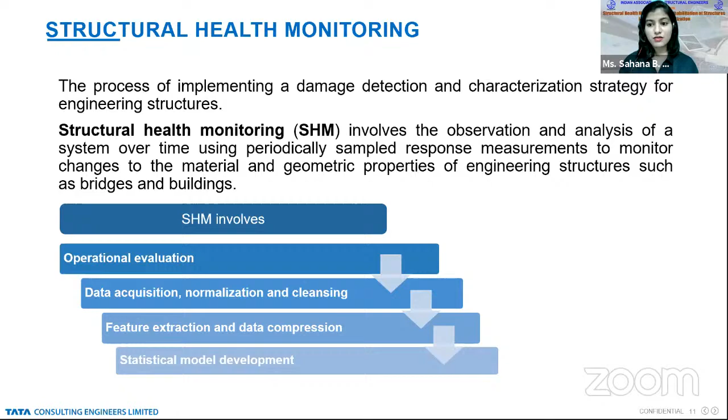So this process is nothing but damage detection. Based on this damage detection, a strategy is made for the engineering structures. It basically involves observations and analysis of the system over time. When I say over time, it's not just for a week or a month, it's over the years, where we can observe even slight changes in material or geometric properties, based on which we can come to a conclusion that there are some abnormal observations, and there might be chances of damage or failures.

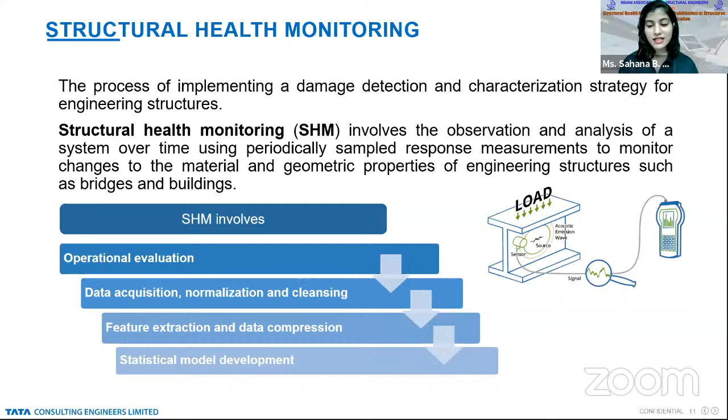So SHM is a bigger process, not just a one step process, I would like to say. It involves a lot of steps. First is operational evaluation, then moving to the second one, data acquisition, normalization, and cleansing. After this is done, we go for feature extraction and data compression, and then we move forward for statistical model development. I would discuss in detail about these processes in the further slides.

First, let's see - we discussed about digitalization, and we discussed about structural health monitoring. But how will digitalization actually complement structural health monitoring? This is totally a new area, least explored. I would agree with Vishalakshi ma'am on how before it was just visual inspection, where if we saw something irregular in that part of the structure, we would then go for non-destructive testing, which again involves a rigorous process. But this can be labor intensive, and we are not sure we are getting accurate results as well.

And that was because until now there was limited exposure to this technology or data analytics, and manual assessment was, I would say, still widely preferred. But the good part is that sensor technology has paved its way into the current generation or current industry, which is gaining ground and will be the future as well. So what exactly happens in sensor technology is that we are using a variety of sensors.

To be specific about these sensors, they are very sensitive to any changes happening in the structure. Because of this sensitivity, we can detect cracks or any abnormal level of stresses or temperatures, and know beforehand that there are some irregularities or abnormal behavior.

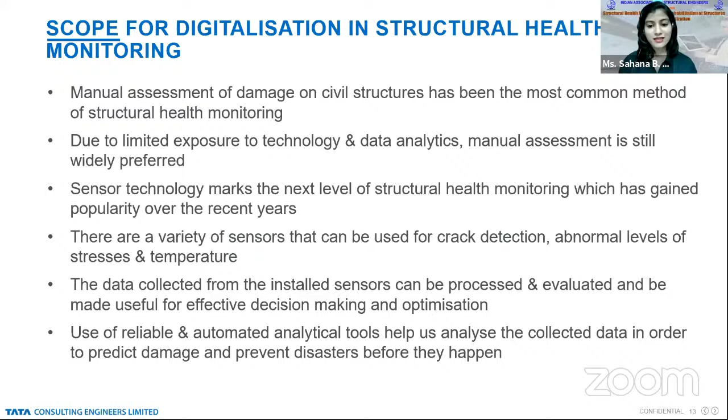There are a variety of tools, but as an application, it still has to be explored in structural health monitoring. But it's good to know that people are now actually using sensor technology for data collection. That's the first step towards the betterment of this process.

Now I would like to move forward and discuss the complete process of how structural health monitoring can be carried out. The first step is always operational evaluation. When we start a project, we should always discuss the scope: what is the building for, what's its purpose? Even when deciding to set up a structural health monitoring system, we have to decide exactly what we are performing the structure for.

Are we performing it just to know about the operational or environmental conditions, or are we assuming that after a certain point we might experience a failure? This totally depends on the type of structure which is going to be monitored.

These are the few questions operational evaluation focuses on answering. Firstly, safety is of major importance, so we must see what the life safety implications of installing these sensors are. Also, cost is always an important part - is there economic justification? Initial cost of sensors can be high, but is it really justified over years of performance, where at the end of the cycle we can improvise and extend the life cycle of the structure? That's what operational evaluation first tries to figure out.

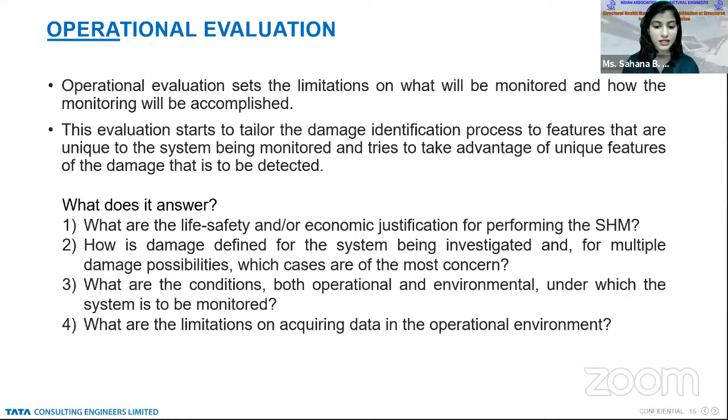Based on all these questions, the complete scope of structural health monitoring is first set up. Once this is done, the next process is to decide upon the type of sensors. Based on the scope, we will decide what type of sensors to use, the number of sensors, and the location at which they will be placed.

Once the sensor is placed, how do we take the data, what is the storage, where do we store that data, and where is the transmittal hardware. The most important point is the interval at which data should be collected. Sometimes it's every 15 minutes, sometimes 30 minutes, sometimes even every second. That totally depends on the scope of that particular project.

Moving forward, sensors are the main point in structural health monitoring. There are particular types of sensors used especially for SHM to facilitate this monitoring process, so engineers can make decisions based on the data obtained. So when I say sensor for SHM, it's not just one sensor, it's a complete network of sensors, and that network can be in hundreds, maybe 300s or 500s. That depends on the type of structure, how big it is, and what has to be monitored, and under what critical conditions.

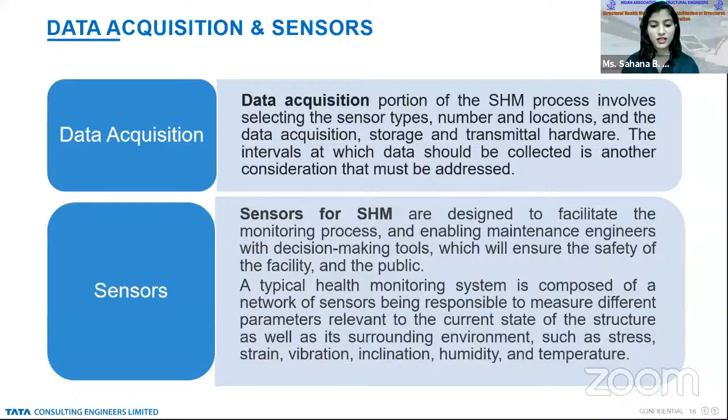I would like to throw some light on the types of sensors widely used in SHM. First is the fiber optic sensor, where we use optical fibers as a sensing element. They are very, very sensitive. This fiber optic sensor is a wired sensor, and it can be used to measure different parameters: strain, structural displacements, vibration, acceleration. So it can be used for the majority of purposes, I would say.

The next one is the accelerometer. We know that bridges and similar structures are subjected to continuous dynamic loadings due to trucks or movements of buses or anything. Over a period of time, there are certain changes in structural dynamic characteristics due to damage or any changes in performance. So this accelerometer can be used to determine acceleration forces through single or multi-axis directions.

The next one is the linear variable differential transformer, which is an electromechanical sensor. If there's any difference in loads or temperature variations, this detects it and finds the displacement, and this displacement can be measured from a few millimeters to a few centimeters.

The next one is the load cell. Load cells are used wherever you demand accuracy and precision, because any little changes in forces can surely be detected on the tension, compression, pressure, and torque side of things, where the measurement is sent as an electrical output. It is directly proportional to the force applied, so based on that we can make out whether there are some changes, or more loadings than the initially calculated ones.

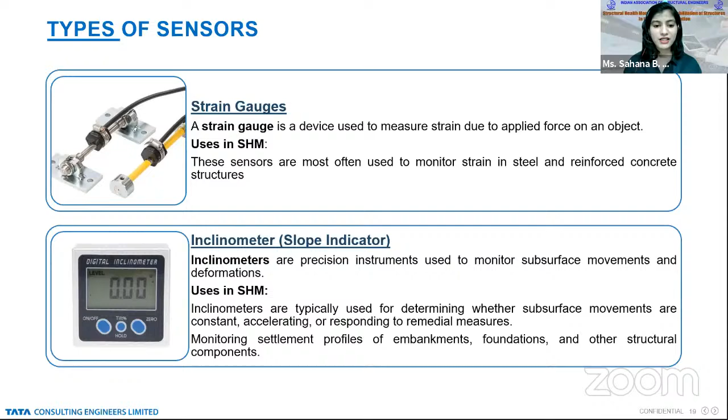The inclinometer is a slope indicator, where slight movements, subsurface movements, or any deformations are recorded. The major use of this inclinometer is to monitor settlement profiles in embankments, foundations, or other structures, where this slight movement can actually cause huge failures, or at least give us an indication that something is not right and could have problems. That is a major application where we use the inclinometer.

Temperature sensors, I would say, are widely used everywhere, and find major application during construction, where the curing temperature of concrete has to be monitored while casting. It basically works on a very simple principle: voltage is always directly proportional to the temperature raised. Based on these temperature variations, the voltage will indicate the temperature, or any uncertainties in it. That's how temperature sensors are used widely in construction.

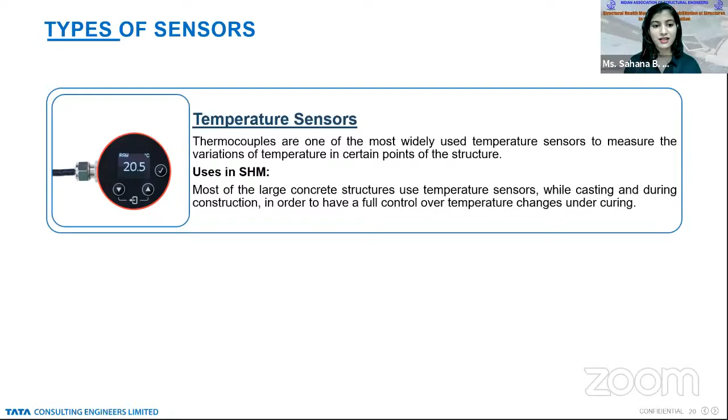Now we are introduced to all the sensors, and we have so much data. When I say the data is being collected for so many years, imagine the ample amount of data we have in hand, like billions, trillions of data, depending upon the cycle or duration at which it is recorded.

No. So obviously that abnormal data has to be trimmed or removed. This is nothing but data normalization, where we take the data and see what exactly is normal data and what is abnormal data due to some triggered conditions which are not in our hand. That process is data normalization, and data cleansing is nothing but to pass or reject this selected data from whatever normalized data we are taking.

The rejecting of unrequired data and selecting only the required data is data cleansing. So once we have a set of normal data without other variations or abnormalities, now what do we do? We have to be able to distinguish between undamaged and damaged data. We have data, but can we say this is undamaged data and this is damaged data? Yes, that is nothing but feature extraction in the area of SHM.

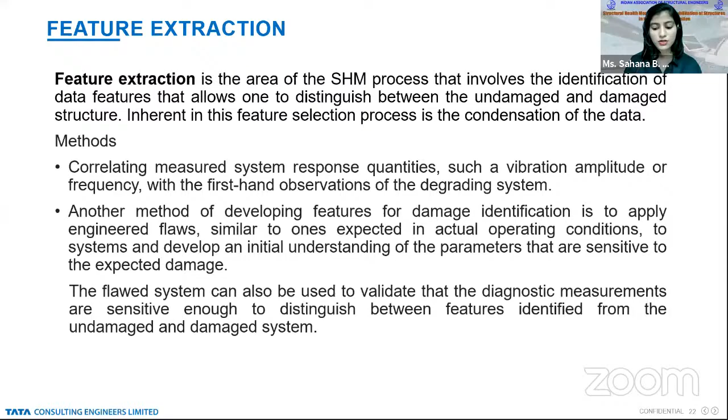Moving forward is data condensation. This is a continuous process. Again, even after normalization, there is again a huge set of data. But it's more important, as I told, how are we going to utilize this data? Are we going to leave the data just right there, to that structure? Can we use it in the future?

So if we are using it in the future, how can we save this? There are data reduction, size reduction techniques. But again, when we compress an image, the quality of the image reduces. So this data condensation is the point where we are actually compressing the data, but making sure to retain that feature sensitivity.

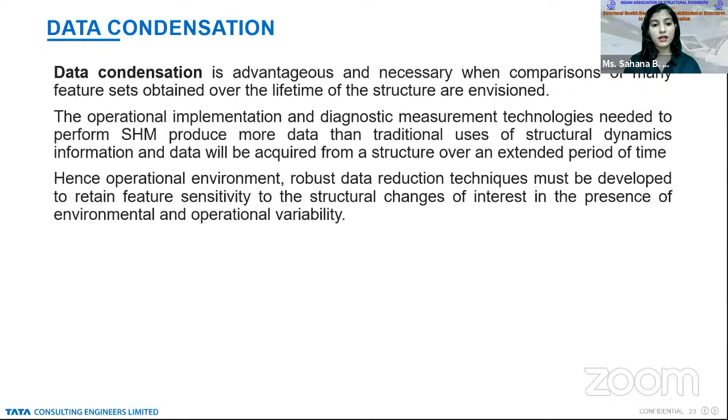Whatever we have detected has to be retained, so that it can be visible in the future if we are using it for feature extraction or some other structure. We have to make sure that sensitivity is retained. This is a challenging task that has to be explored and developed in a more optimized way.

Next is statistical model development. This is where digitalization is the major part - data science, machine learning, everything comes into play. This is the least explored area in structural health monitoring or structural engineering. But undoubtedly, this is going to be the future, and this is how every process is going to be done.

Statistical model development is concerned with implementation of algorithms that operate on extracted features, out of which we have to make a decision. Can we make certain decisions from the data? Can we identify patterns to spot irregularities? That's where this process comes in, and it can be done in different categories.

There's supervised learning and unsupervised learning - these are the machine learning techniques. Since this isn't much explored in structural health monitoring, let me give an insight: let's say we have undamaged data available from an undamaged structure and a damaged structure.

In supervised learning, everything is already fed - if this is the variation, it means there's some problem; if this is the variation, it will collapse; or if this is the variation, there's abnormal behavior. It's like having a teacher who already knows the knowledge, and you're a student learning from that. With data of a damaged and undamaged structure, if there are abnormalities, it identifies them as abnormal and categorizes based on that.

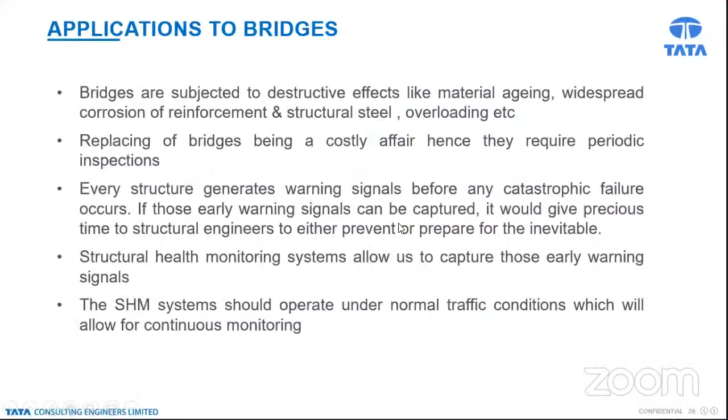Thank you, Sahana, for taking us through what is structural health monitoring, and how digitalization can complement structural health monitoring, along with a brief insight into the process of structural health monitoring. So after having a brief idea on that, let's move on to the applications of structural health monitoring to bridges and heritage structures.

So we know bridges are the most commonly used infrastructure components, and they are always subject to a lot of overloading, high levels of stress, and material aging. So when we design a bridge, we always design it for a particular level and volume of traffic. It may not always be true that 30 years hence the bridge is going to be subject to the same amount of traffic. Obviously we always have a factor in place to consider this, but the traffic level is always so dynamic that the level of loading a bridge can be subjected to is also dynamic.

So every structure, when subjected to some loading or some abnormal loading, always exhibits some warning signs. How beneficial would it be to us if we could identify these warning signs, if the structure could tell us that there is some damage happening here, and the relevant engineer could go observe the structure at that point and prevent damage or catastrophic collapse. That is the reason we look into structural health monitoring systems being installed onto bridges in particular, or any other structure for that matter.

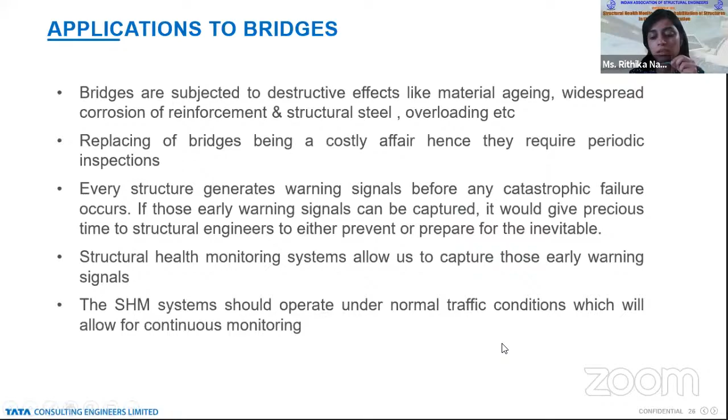So like Sahana explained previously, this is the basic methodology of an SHM system. We install some sensors on the structure, and the sensors generate some data. You acquire data from the sensors, and this data has to be processed, and you perform some analysis on the data acquired. This can be done using a lot of data analytics softwares. And whatever data you have acquired and analyzed finally has to be effective in helping you take a decision as to what kind of rehabilitation or remediation needs to be done for that particular structure. So this is the idea behind installing an SHM system on a bridge.

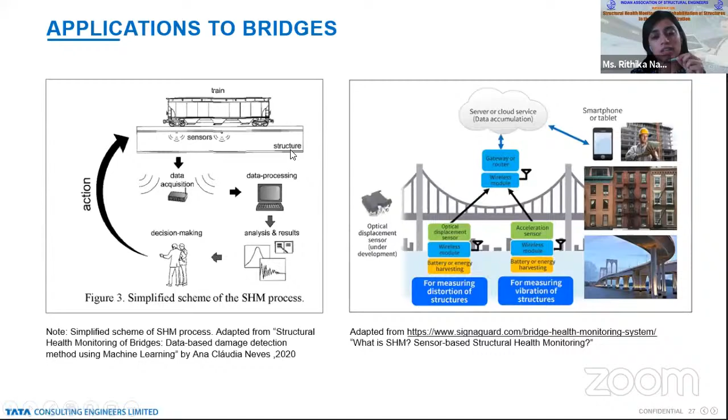So for any bridge monitoring system, these are the four main components: a system control unit, a sensor unit, a software, and a communication capability. Let us see what each of these units mean. A system control unit is the hardware of the bridge monitoring system. If you're using wired sensors, all the sensors are going to be wired to this particular unit, which can be used to turn on or off the sensors, and to record. Once data has been acquired from the sensors, it will be stored on this system control unit. So in short, the system control unit is like the heart of the bridge monitoring system, where all the operations take place.

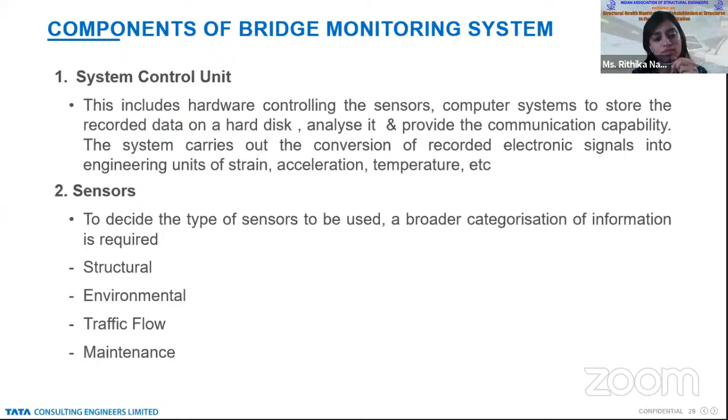And the next unit is a sensor. There is a broad categorization of this, four categories we could say, for a bridge in particular: structural sensors, environmental, traffic flow, and maintenance. So we'll just see a list of a few of the sensors that we use for bridge monitoring. There are many more, and these are just maybe the most commonly used type of sensors.

The accelerometer is used to measure vibration. Bridges are always subjected to a huge amount of vibrations, so accelerometers are used for that.

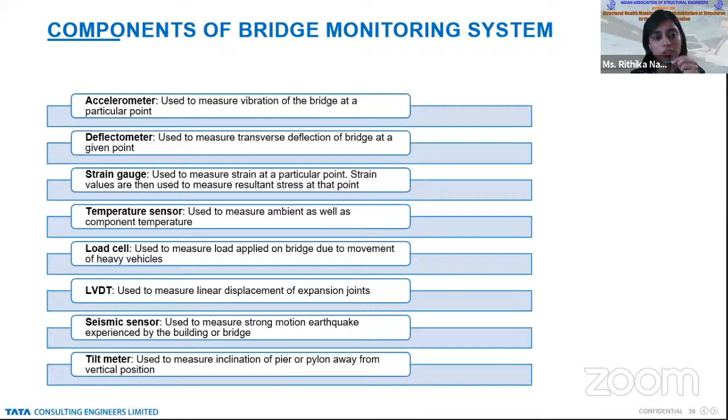Deflectometers are used to measure the transverse deflection of the bridge. Strain gauges measure the strain at a particular point, and with that strain value you can obtain the stresses that the bridge is being subjected to. Temperature sensors, load cells, LVDTs, and seismic sensors are used to measure strong motion earthquakes. A tilt meter detects tilt in a pier, pylon, or any vertical element subjected to some amount of tilt. These are a few of the commonly used sensors.

Now, software. Once you have that huge amount of data, it needs to be analyzed using software. Depending on the size and location of the bridge, you will set up a different type of bridge monitoring system. Every bridge need not have the same kind of monitoring system; each kind of bridge has a different type, and depending on the requirements of that structure, you may have to develop a software.

If you're installing vibration sensors or accelerometers on the bridge, your software should be catered to that, so it reads the signal generated from the accelerometer and tells you that the bridge is subjected to vibration, and analyzes the level of vibration the bridge is being subjected to.

Next, communication capability. With this amount of data, you need not sit at the site where the bridge is constructed to do the analysis. You can be elsewhere and analyze all this data, so for that we need a good internet connection to transfer the data to a host computer, which could be at another location. This is also very important.

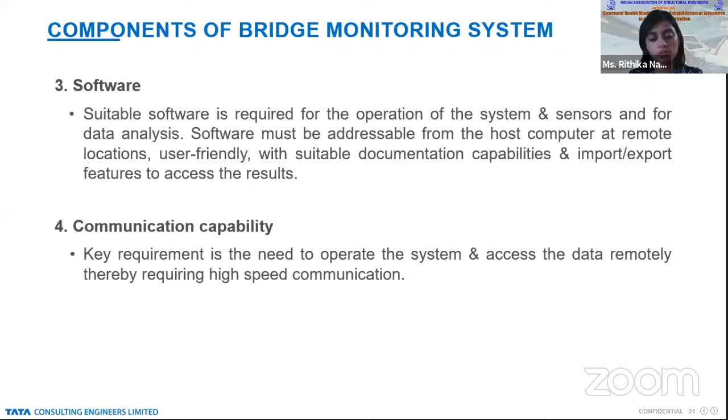Next, we'll move on to heritage structures. These are also very important because these structures might have been constructed about 200 to 300 years ago, and it becomes very important to preserve them. So monitoring of heritage structures is equally important.

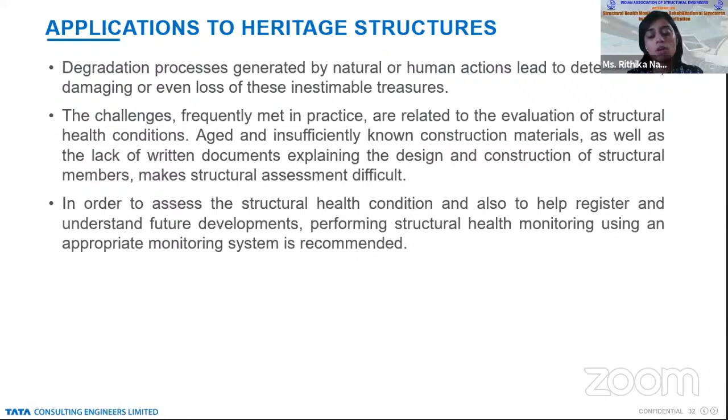There are challenges associated with monitoring heritage structures because we do not have sufficient information on the material used. Usually heritage structures are constructed using stone masonry or bricks, and we do not know exactly what kind of material or design concepts were used, nor do we have the drawings used to build them. Hence it is challenging to do the monitoring or install a monitoring system. The lack of technical details and knowledge of the structural condition makes it a challenging task.

So what we do is, when the authorities feel that after say 100 years they observe some amount of damage or cracks in the heritage structure, that is when they feel they need to do some level of monitoring in order to preserve the structure, improve its performance, or improve its lifetime.

So they go in and this monitoring system could be long-term or short-term. You can install it for about 3-4 years, collect all the data you need, perform the required analysis, and then apply your engineering to come out with a rehabilitation technique.

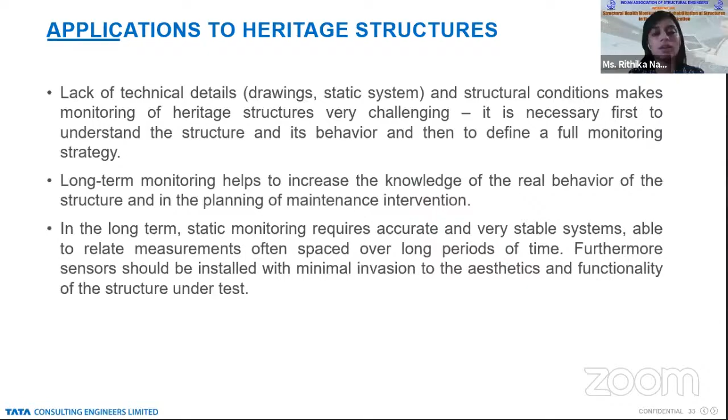Long term could be when you have a structure extremely important to the country's economic condition or similar, where you have more funds to install a long-term monitoring system. Then you install the sensors right from its inception until the time you feel the structure needs monitoring.

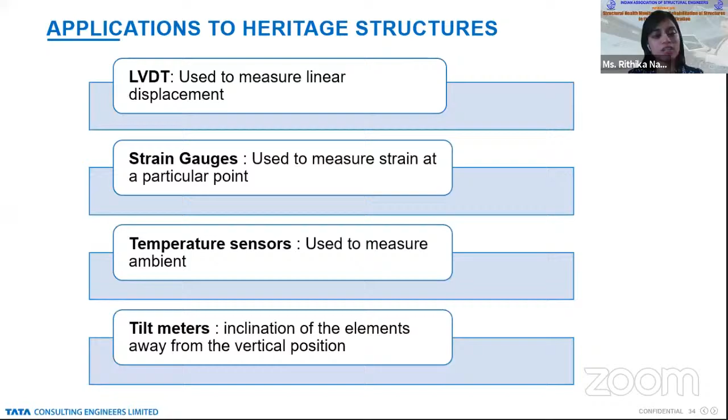So these are some of the commonly used sensors for a heritage structure: LVDT, strain gauges, temperature sensors, and tilt meters. We have seen the application of the technology for bridges and heritage structures. Now we will see some real-time examples.

So this is a case study of a bridge in China. It's called the Jiubao Bridge. It is a tied arch bridge, and it has been constructed in the year 2012. From the picture, you can see this is an extremely long span bridge. The span of the bridge is approximately 1,855 meters.

You can see a layout of the sensors that have been installed. There are hundreds of sensors installed on this bridge. The parameters that need to be measured for this particular bridge are more in number. So based on the number of parameters and the number of locations you need to monitor, you can come up with a plan as to how many sensors have to be installed.

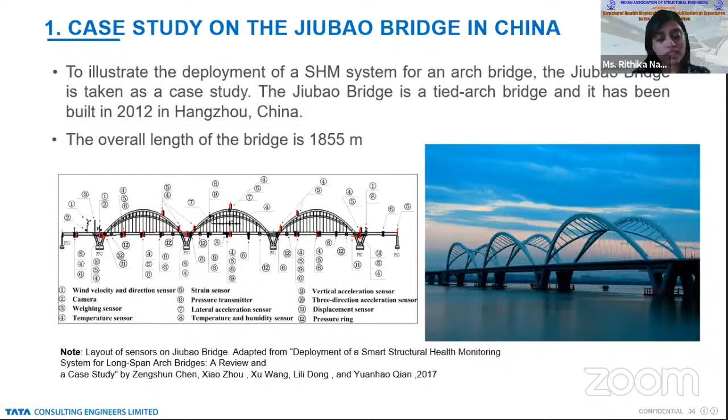You can just get a brief idea on where all these sensors have been installed on this particular bridge. These sensors, for this particular case of the bridge, are installed to obtain the wind speed, direction, environmental temperature, humidity, and the beam deflections, bearing displacement, etc.

So totally 11 parameters were to be monitored for this particular bridge. Considering all the 11 parameters and the different locations of installation, a total of 333 sensors were installed on this particular bridge. So for a smaller bridge of shorter span, you may not have to install so many sensors.

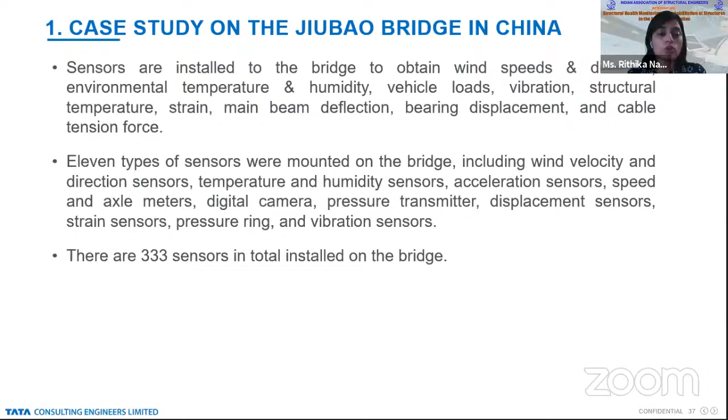So this particular bridge, considering its span and the different parameters that needed to be analyzed, had to go in for a total of 333 sensors.

Moving on to damage identification. This is the next step, and it's the most important step. The structural health monitoring system was installed at the inception of the bridge, not at a later stage. One of the most commonly used methods here was to compare the model for a damaged structure and the model for an undamaged structure.

So we could compare the modal parameters. Modal parameters like our mode shapes, frequency, time period, etc., for any structure, are functions of the physical properties of that structure. So for an undamaged structure, we model the mode shapes or the frequency.

We know how the mode shapes would be for an undamaged structure. So we can assume that in the first few years of the structure, it is an undamaged structure.

So post, say, 15 or 20 years, when we actually try to compare the modal shapes or modal parameters for a damaged structure, we can clearly identify if there is some difference in the parameters, and that indicates some anticipated damage in this particular element.

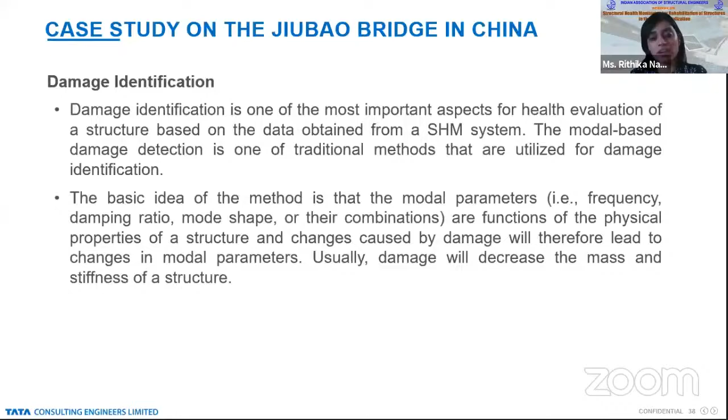So each sensor will generate so much data that you can develop all these parameters using a suitable software in order to perform this comparison.

So this is just an example. This bridge was built in the year 2012. So as of now, we do not have any data as to whether they have found any damage for this particular bridge.

But initially they did some comparison as to whether the sensors were performing well and whether the data the sensors were emitting could be correlated to the actual scenario of the bridge.

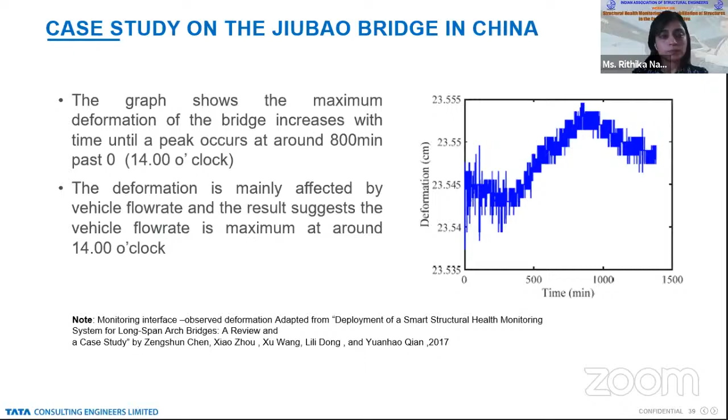So later the sensors were obviously used to monitor the overall performance of the bridge. Now, this is another heritage structure.

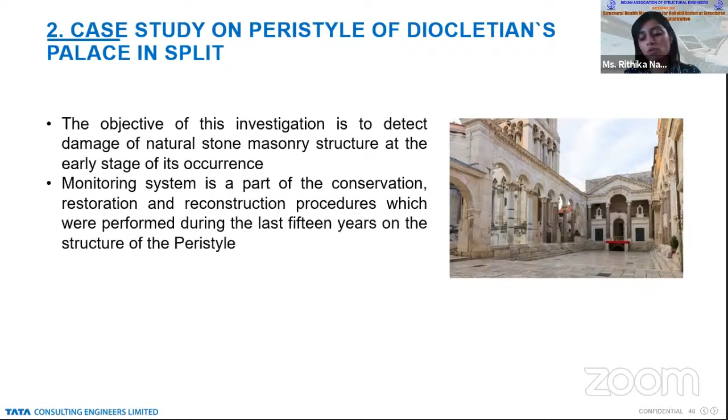There are many challenges in heritage structures. You can't install sensors in a way that ruins the aesthetics of that particular structure, and there are many challenges like that.

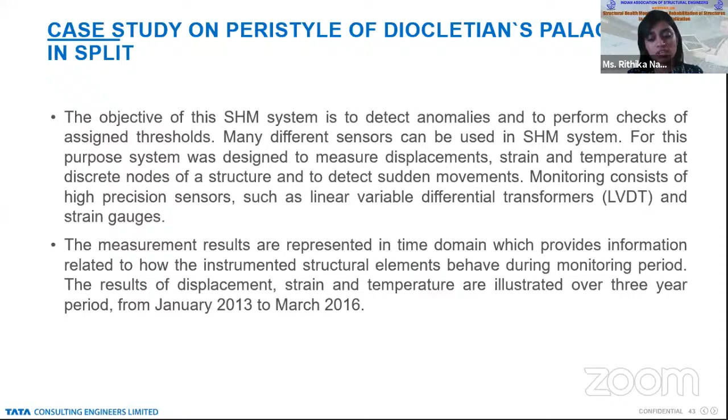Finally, they installed the sensors for a period of about 3 years, between January 2013 and March 2016, when they performed the structural health monitoring. All the data collected during these 3 years was used to finally perform analysis using a software called LabVIEW. Using the software, they were able to perform the analysis and finally generate the required damage scenario.

In the case of the bridge, the monitoring system was installed at the inception of the bridge. But here, we do not have that. When you say after 15 years for that bridge, you can obviously compare the data, how the structure behaved in the beginning versus how it's behaving now. But in this case, we do not have any previous data to compare with.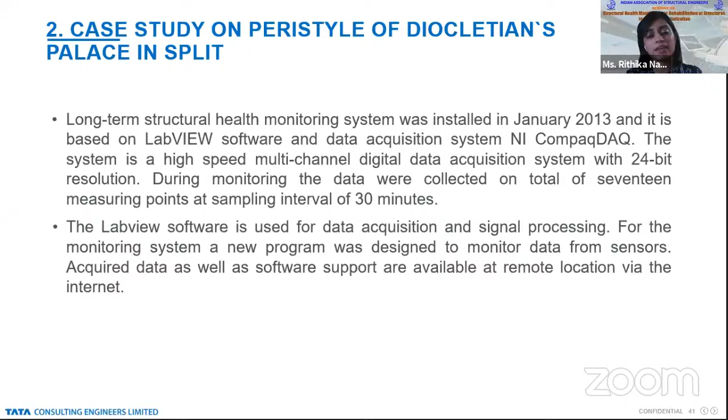So the method they adopted was to set certain thresholds, based on engineering experience, like the strain should not exceed this value, or the displacement should not exceed this particular value. This can be decided based on a lot of engineering expertise, and you require engineers to be a part of this project.

You require the person installing the sensors to tell you whether installation at a particular location is feasible. This requires a whole study to finally decide the suitable locations of these sensors. So for this particular palace, what they did was set certain thresholds.

When the software detected that the strain measurement, deflection measurement, or temperature was going beyond that particular threshold, it used to raise an alarm. At that time, they were able to tell that at this particular point, at this particular arch, there was some damage which was not normal.

That was when they could go and actually visually identify and try to rehabilitate that particular element of the structure.

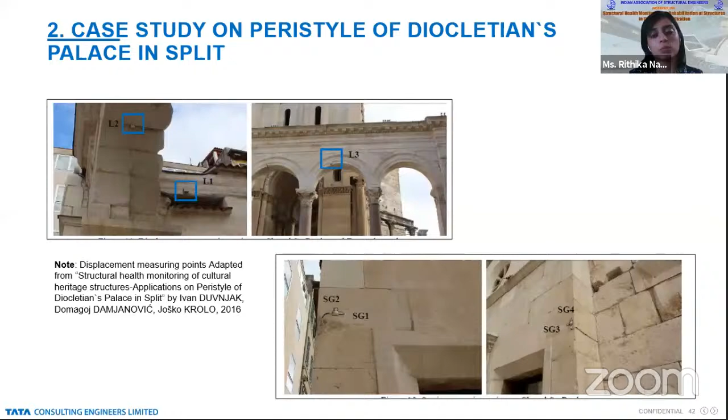So the examples we've seen till now are for a bridge in China and the palace in Croatia. Now let's see some examples in India as well. In the last 2-3 years, India has also tried to take a step towards digitalization, towards structural health monitoring using digital technology. These are news articles showing where sensor technology has been adopted in India: one is a bridge in Tamil Nadu, and the other is a bridge in Kolkata.

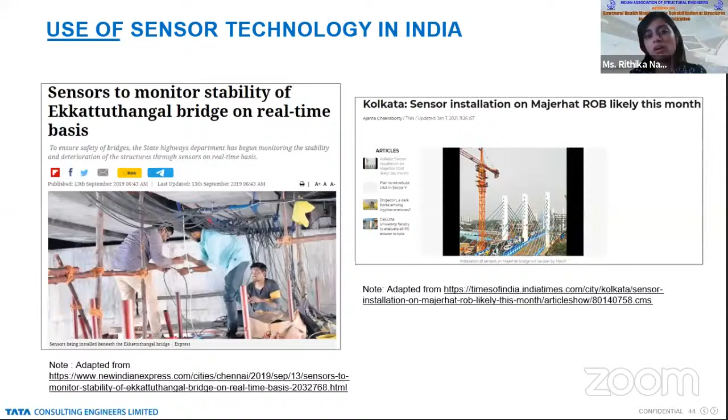In the particular case of the bridge in Tamil Nadu, a total of 41 electronic devices were installed on this bridge. The sensor manufacturers were asked to install these at suitable locations in order to identify and measure certain vital parameters of the bridge, to give a complete picture of how the bridge is going to behave.

This system was not installed when the bridge was constructed; it was installed at a much later phase when they felt they could go ahead with a structural health monitoring system. This is the case of the bridge in Kolkata. As you can see in the picture, the bridge which was located in the same place earlier had collapsed, and the reason attributed to this collapse was lack of maintenance.

So this bridge collapsed in the year 2018, which is quite recent, and the new bridge was constructed in the year 2020. When they constructed this bridge, they realized that a lack of maintenance was one of the major reasons for the collapse of that bridge.

How do you tackle that problem? You try to install a suitable SHM system. So they went in for this digital technology, where they installed wireless sensors on the bridge, and were able to measure the bridge's integrity using indicators like strain sensors and vibration sensors. A total of 30 smart sensors were installed on this bridge, and this is how they went about improving the performance of this particular bridge.

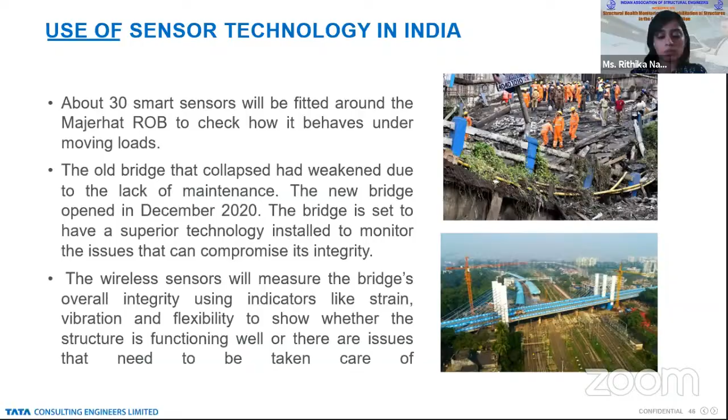Obviously, when we adopt any technology, there are some challenges we face. Big data is one of the biggest challenges, because the sensors are emitting data every 2 minutes, every 5 minutes, depending on the time interval we set, but every 30 minutes or 15 minutes there is some data being emitted. Imagine collecting this data for 10 years, 15 years. So what do you do with so much data? How do you actually use this data to analyze? That is one of the biggest challenges people face.

You need to identify the useful data that can aid your decision making, and the relationship between the measured data and system parameters. When you're measuring the deflection of a particular beam, how do you correlate this to the actual deflection? In our analytical calculations, we always have different parameters like the cross section of the beam, and the size and length of the beam coming into the picture. But how do you correlate the data the sensor gives to the actual scenario of that particular beam? That is also a challenge in this case.

Now, uncertainty in environmental and operational conditions. When you're collecting this data, not all of it is useful. There is some uncertainty due to environmental and operational conditions, which can lead to erroneous data, and this erroneous data has to be finally eliminated. As explained previously, there are different methods, data cleansing, data normalization, where you can try to remove all the data which you feel is not useful. Finally, you have a set of data which you can tell the software, and which the software can tell you how the actual damage scenario is.

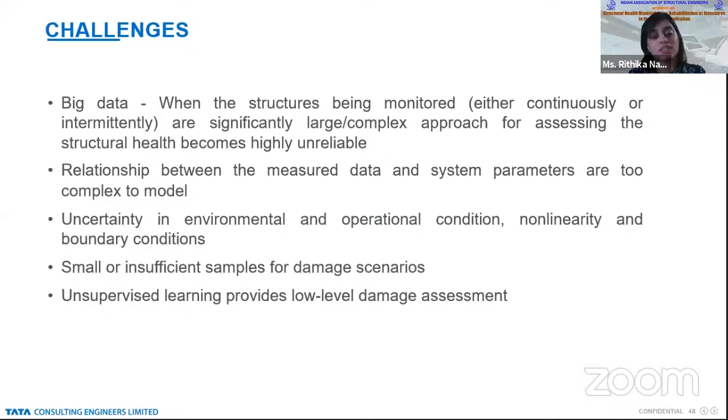Small or insufficient samples for damage scenarios, and unsupervised learning provides a low level of damage assessment. As explained, for supervised learning we always have a reference, like comparing with an undamaged structure, or a threshold based on our experience, with which we compare the data we have. But in unsupervised learning, we do not have any known value or known data to compare the data being collected from these sensors. So that is also a challenge for us in this current scenario.

So finally, we move on to the conclusions and future scope. After seeing how digital technology has complemented structural health monitoring, we can say that this technology has actually paved a new path for structural health monitoring methodology. Earlier, when we used to go to the site and do a visual inspection of a beam or a building, it used to be labor intensive, take more time, and be expensive as well. So this is a new technology that has evolved in the past few years, and it has proven very fruitful.

An efficient design of a sensor network for structural health monitoring applications is a major milestone for a robust and effective system. The critical step in new SHM approaches is to build an information system, where we can make good use of that data to fuel our decision-making capabilities. And finally, any SHM system that you design, it's not very easy to define.

So when you say for that case of that bridge in China, it was such a long span bridge that you had to sit and actually evaluate the locations where you feel the strain or deflection is more. So any SHM system that you design, you need to finally come out with a very detailed, effective location of the sensor, the number of sensors, and the type of sensor that needs to be installed. When all these three parameters come together and you arrive at a very effective structural health monitoring setup, that is when we can say the system is actually effective and successful.